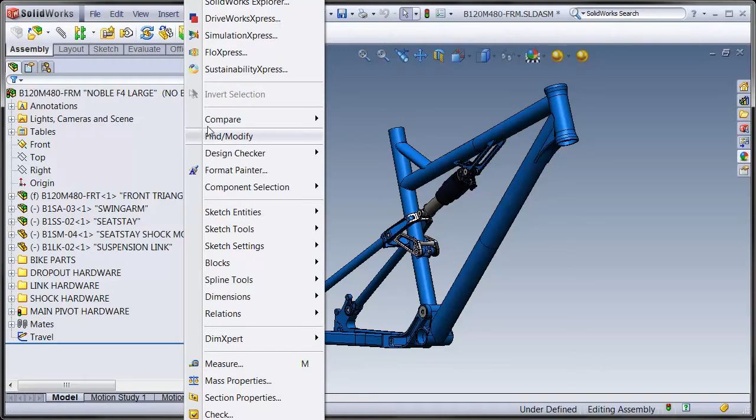And as you look at this, it may look like a fairly simple assembly with not too much going on. It actually gets out of control relatively quickly, and you've got to be aware of that. For example, if I bring up the AssemblyXpert window, you'll see that the total number of components in this model is 92. That's a fair amount of components to keep track of, and you really want to make sure that you keep all this stuff organized, otherwise your model can be really cumbersome to work with.

And you organize it on the left side here in what's called the model tree. The way we organize it, we've got some top-level components that form the actual functioning frame. For example, we've got the front triangle highlighted in green, the swing arm, the seat stay, shock mount, and suspension link. These top-level components actually form the functioning suspension frame, and we can work with that and extrapolate data from that. It does not include any of the hardware.

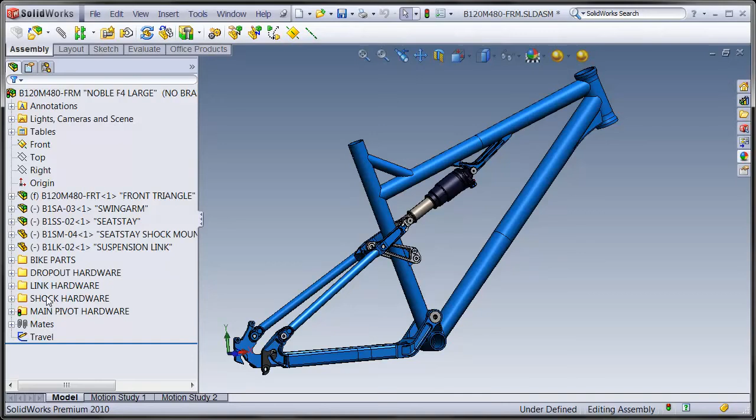The hardware is organized in its own little features. Like here we have these folders that have all the hardware in it, and we organize it in such a way that it points to a particular area of the frame. So for example, if I open up the link hardware folder, here you can see that we've got pivot axle screws, pivot spacers, and at the bottom here we've got some modified toolbox components. By organizing stuff like this in folders, it becomes very easy to locate parts as you work with your model, because like I showed earlier, we've got to keep track of 92 components, and that can get confusing very quickly.

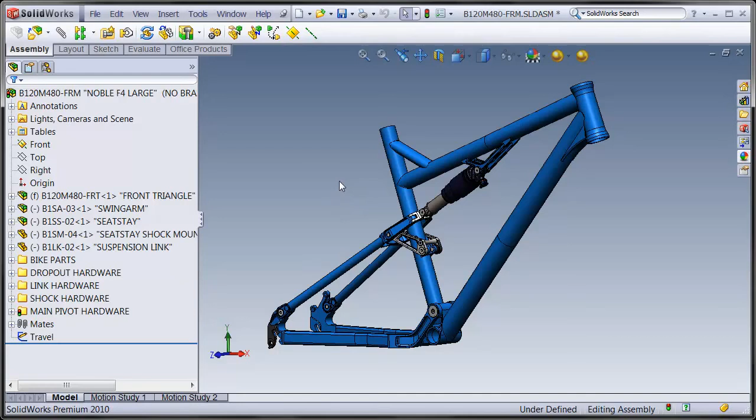Another thing to note is that this is a functioning 3D model. It actually works. But there's a little quirk here that maybe not everybody is familiar with. For example, if you look at the shock here, the shock is its own little assembly, and by default SolidWorks will want to bring that in as a rigid subassembly. The shock actually is compressible as its own little assembly, but if you bring it in rigid, the suspension won't move anymore.

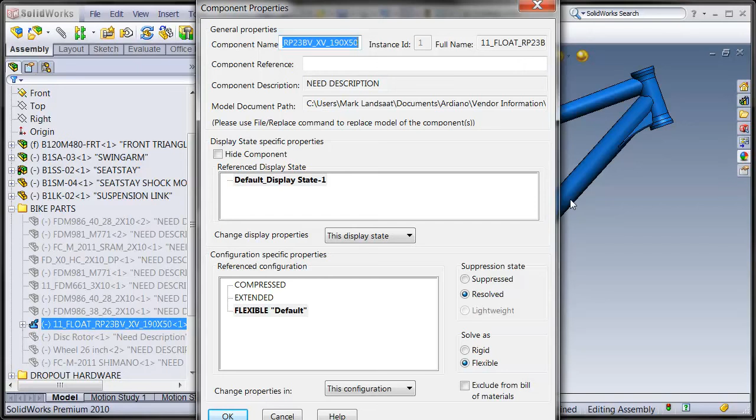So you actually have to come in the component properties window, change rigid to flexible to make sure that this thing will actually work as an assembly. Those are just some small things that are really important to know, because otherwise you end up with a model that is actually not functional.

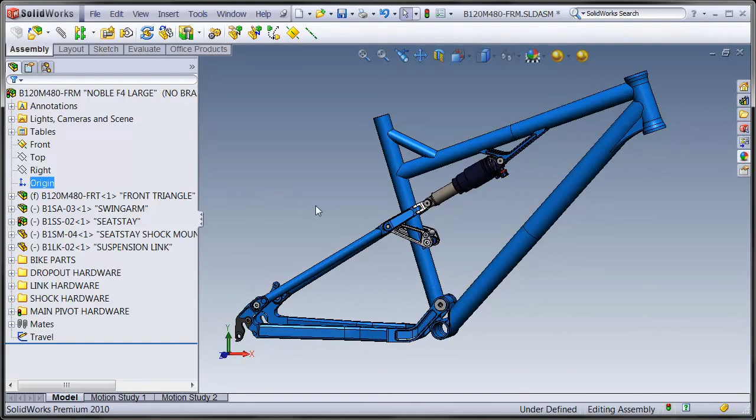So at the top level here we have a couple of top-level components, and then all the hardware located in folders here. And then what we'll do in video number 2 is actually go into a little more detail on how we built some of these parts. For example, the next series will be the front triangle, and we'll show you how we set that up and how we actually built that model, and we'll go from there.